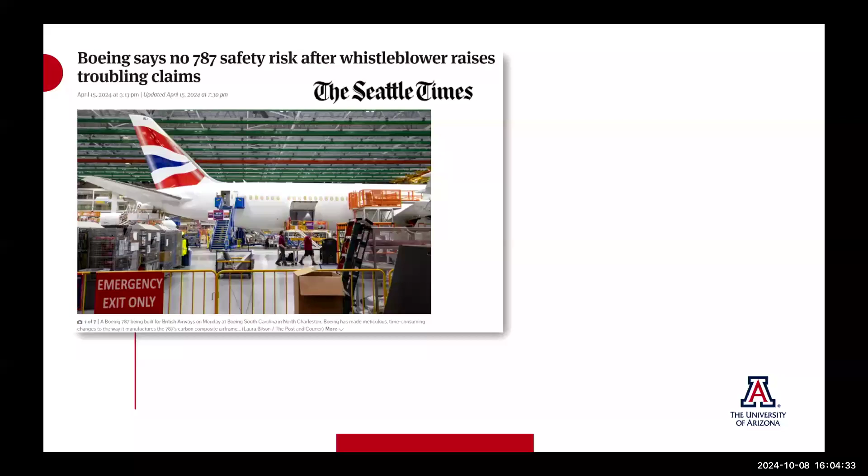So when we think manufacturing, it's actually a little bit top of mind. We've seen a number of headlines that have talked about manufacturing. Of course, not all of the reasons that Boeing is in the news have to do with manufacturing, but some of them do. There's been various quality issues, whistleblowers coming out and saying that some of their processes for dealing with deformed parts because of various manufacturing processes are inadequate and could lead to increased load beyond what they say in some of their documentation. Tesla has been plagued with some manufacturing issues of various kinds.

I think that this isn't a surprise to many of us with mechanical engineering backgrounds. Doing manufacturing is not easy, and incorporating an understanding of the manufacturing process into our design decisions is perhaps not intuitive and can often be challenging because we don't have adequate tools or methods to do it well. So that's kind of what I'm going to be talking about today.

I'll start with a little bit of specific background that's been motivating for me, which is some work that I did in grad school and shortly after, specifically interviewing startup employees, startup founders, and startup employees about their design for manufacturing practices. This is not exactly the same as industry practices, but I think that there's some natural synergies across the two.

Dr. Kramer and myself did an interview study where we recruited 12 employees, 12 engineers at various startups. It's a little bit of an eye test for those of you in the back of the room, but you can see that their titles varied: CEO, CTO, design engineer, senior mechanical engineer. Job experience, the lowest was 2, the highest was 12, so moderately experienced, not extremely, but still many years of experience. The sectors were pretty widely varying with size of employees going up from 1 all the way up to a pretty successful startup with over 1,000 employees.

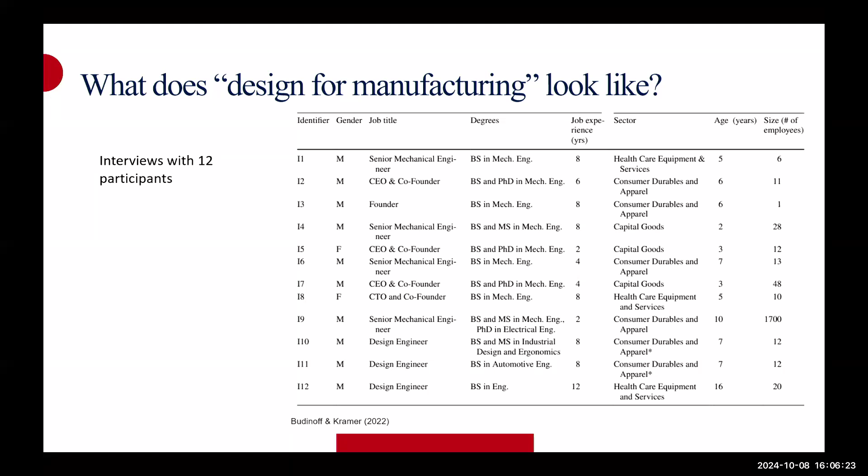We found a variety of design for manufacturing practices. These might not be things that came out of a textbook, but they were ways that the engineers told us they considered design, they considered manufacturing during the design process. We categorized these into 4 basic processes: considering different manufacturing processes before they had decided on a particular manufacturing process to use, understanding manufacturing constraints, identifying manufacturability constraints, more geometry specific, and then troubleshooting manufacturability problems.

You can see that in increasing lightness of the blue color, that's increasing specificity to their particular product. Across the top axis, we have a general design progression. Of course, it's iterative, but from initiation, we found a big difference between when they had CAD and when they didn't have CAD in their processes, and then after the first large production run.

So we identified common practices and mapped this onto these 2 axes. I'll read some of these: consult external resources, that might be a website, it might be a textbook; identify flexible manufacturing processes that would allow them more room to maneuver in the design space; use cost modeling; use personal knowledge of manufacturing processes; incorporate existing designs and use them as a baseline; consult manufacturing experts for feedback; conduct design reviews with manufacturing experts; utilize CAD manufacturing simulation tools; and actually try and get experts to help with production problems and testing the product to verify performance with as-manufactured properties. This encompasses from all 12 engineers, pretty much everything that they said could be mapped onto one of these specific practices.

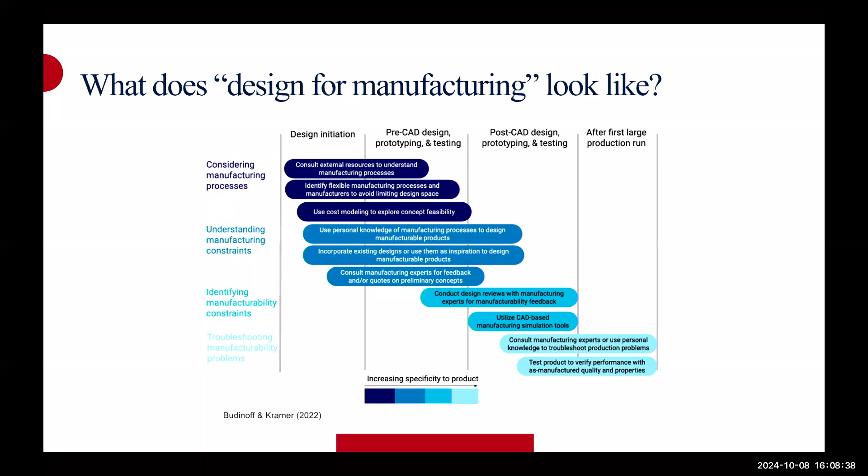So across the top axis now, we have all 12 of our designers. The color indicates the number of instances where they described using this DFM method.

I'll highlight three. The first one is consult external resources, something like I looked at a textbook, I looked at a blog. That was by and far the most consistently and most used process, but it's fairly basic and also not very specific to a particular part or geometry.

Another one is use personal knowledge of manufacturing processes to design manufacturable products. People spoke about taking a machine shop class and understanding what could and couldn't be manufactured based on their hands-on experience with a particular process.

Then finally we have two related ones that were pretty widely used: consult manufacturing experts for feedback and/or quotes on preliminary concepts, and do design reviews with manufacturing experts. These were pretty consistent, where people did this a lot.

Obviously there's some pros and cons for each of these. At startups, they're fairly resource constrained, so they didn't have tons of money to go out and do lots of different reviews or pay for a lot of different simulation and analyses.

So they used their potential vendors to give them feedback. It's a nice, efficient process, but they were pretty dependent on the quality and the time these vendors were willing to give them. They trusted them to have expert guidance, and they were really reliant on the success of their products being tied to the quality of the feedback they got.

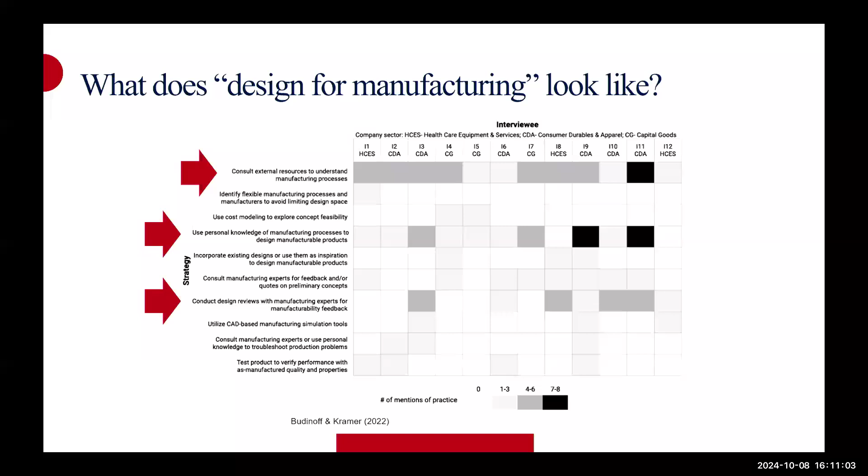One quote we had from a participant was, 'You just need to have scars, you have to have the scars of messing up.' And her mentors were like, you will get those, but right now, in order to save your startup company, you don't have the time or the money to afford those scars. You need to look at a guy who has seen that problem for 20 years.

From this, we understood there was a lot of respect for the expert feedback that external vendors could provide. One reason is because they looked to them for product-specific feedback, based on their CAD models and CAD drawings. They had essentially no other way to get feedback specific to their designs beyond relying on these external vendors. It was their only option to get part-specific feedback, and they really valued that.

It needed to be specific. So looking across all of our interviews, we can extract some of the designers' needs. One is giving feature-level, geometric feature-level feedback that's very specific to their design—this section is too thin, this section is too thick, this will be difficult to access, et cetera.

They really wanted iterative rounds of feedback. They valued working with vendors who would not only respond to a single emailed drawing, but multiple rounds and would work with them iteratively. They really wanted the feedback to be based on deep process expertise.

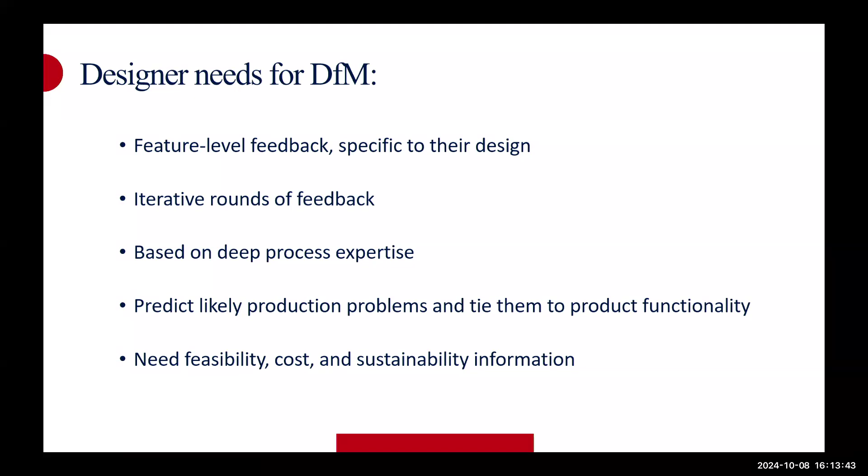Let's talk about what exists for them. We have all these methods that designers felt were organic, emergent practices that they developed through their own practice, their own experiences. If we look in the literature, there's a fairly narrow range of what's considered DFM tools.

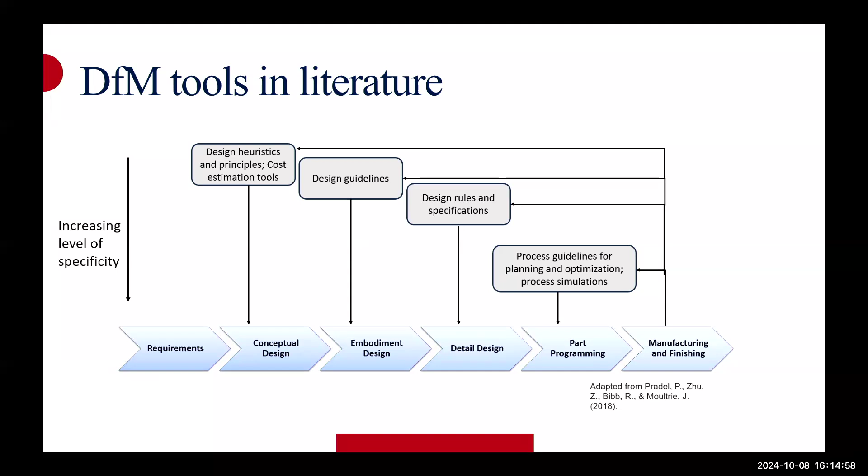But something we see is there's a really big jump here. If you look at the design rules and specifications, the design guidelines, these tend to be just simple heuristics. They tend to be very hand-wavy—keep your pockets to approximately this depth, without a lot of specific guidance. It's also generally just a rule, something you can manually check, but it's not easy in many cases to actually evaluate for a CAD model. Whereas for process planning and process simulations, that typically needs some sort of CAD model as input.

So we see this big disconnect in the middle to early stage design, where you might have a sense of what your geometry looks like and should look like, but you don't have existing DFM tools that can take that as input. So in general, we see this mismatch between designer needs and current capabilities.

If we look—quick question, yeah, just on the last slide. Where would you normally find that the process gets, maybe not the parameters, but the process itself gets defined?

The process gets selected—like, I'm going to do machining versus something else—probably around here, in embodiment design. So in detail design, this is like, I'm going to have part A and part B in embodiment design, and then in detail design, this is the geometry of part A. It will be this big, have this kind of feature, and it will be sheet metal formed.

Yes, through the... yeah, but embodiment design, I think, is when you start to at least have a sense of the process, but not the exact size of each of the features. This is where you could do a back-of-the-envelope sketch, give the overall feature size, do a rough CAD model, but not finalize it. Thank you.

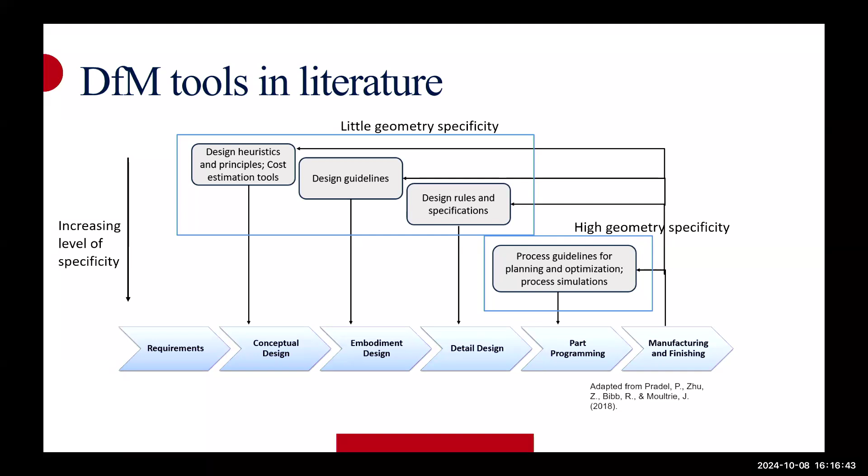Okay, so there's a mismatch between designer needs and current capabilities. If we look at the various solutions in that bin—DFM heuristics, process design rules—there's also a couple of software that exist. aPriori is a startup I think was founded in 2018 or thereabouts. DFMPro is another software.

Let's look at how they map onto designer needs for part-specific results, cost, manufacturing, being able to predict a deformed or as-processed geometry, being compatible with early design, and considering many different manufacturing outcomes. So yes, academic heuristics and guidelines are low cost and easy to use in early design. Existing software can give part-specific results, but it is not low cost—the subscriptions can actually be pretty substantial. It's their entire business model; they're not going to give it away for free.

They typically don't predict manufacturing geometry, but they do basically predict compliance with the design rules, and they can give estimates of cost. So that's what they can provide. They take as input a fully defined, finalized CAD model, and in many cases, they don't consider that many manufacturing outcomes.

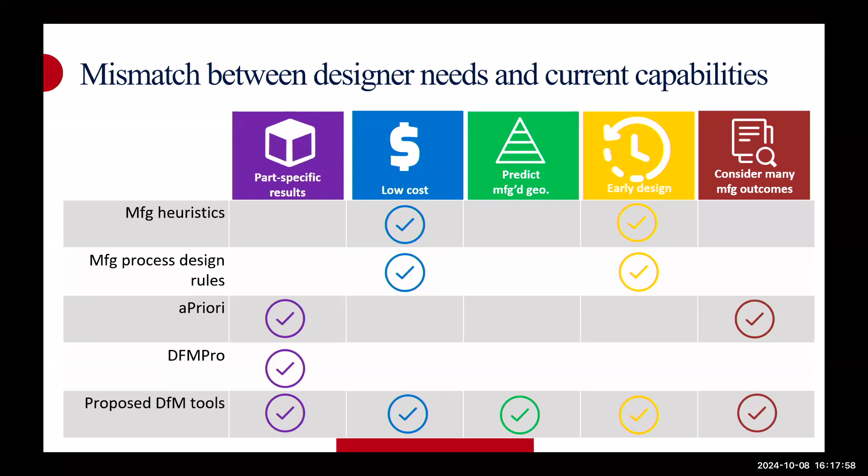So what I want to do is fill this space. I want to develop DFM tools that can check all of these boxes and meet designer needs. Ultimately, my research goal is to develop computational tools that can fill this gap, that can connect designers easily to manufacturing knowledge, so they can get better manufacturing outcomes and design better quality parts. And the software side of it is interesting to me too.

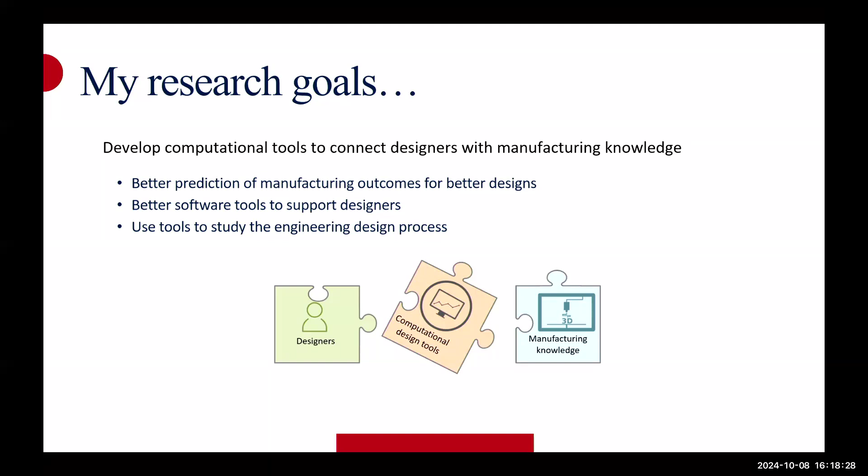I want to develop software tools that can support designers, and then assess how these tools can actually be used in the engineering design process. Today I'm going to talk about 3 studies in that broader category: the effects of DFM tool modality, comparing computational tools to heuristics; surrogate process models to see if they can provide high fidelity feedback faster; and sustainability metrics and how they can be incorporated into decision-making processes.

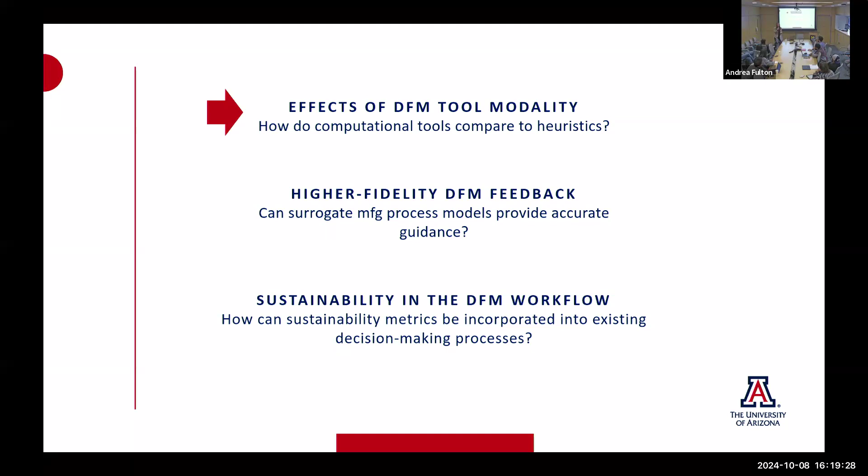So let's first talk about the effect of DFM tool modality. This work came out of my dissertation. I was a TA, and I saw a bunch of poorly designed and poorly manufactured parts for the class I was TAing. We asked students to just 3D print a part, and I would see the same failure modes again and again.

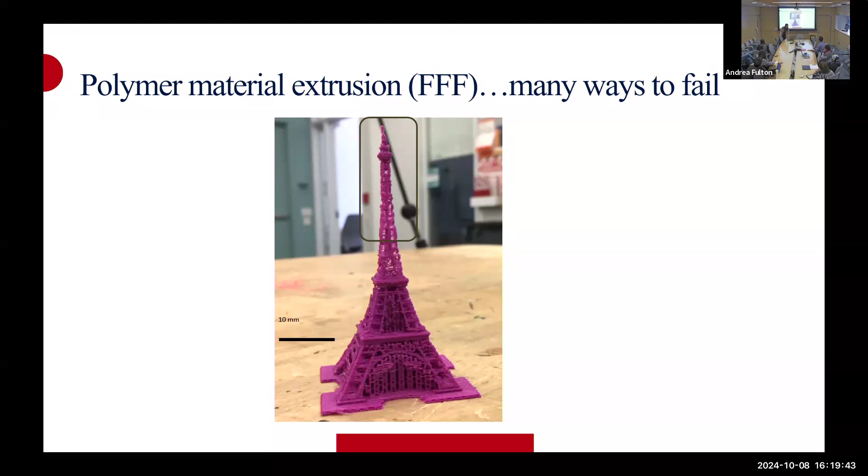So I decided to try and categorize these. I looked at the parts that students submitted. They tried to print a model that really should have been printed with SLA, where the minimum feature resolution was too high. They printed parts with ABS that would warp pretty substantially - you can see that much curl in a corner. They printed parts at ridiculous orientations that actually toppled over with no support material, mid-print.

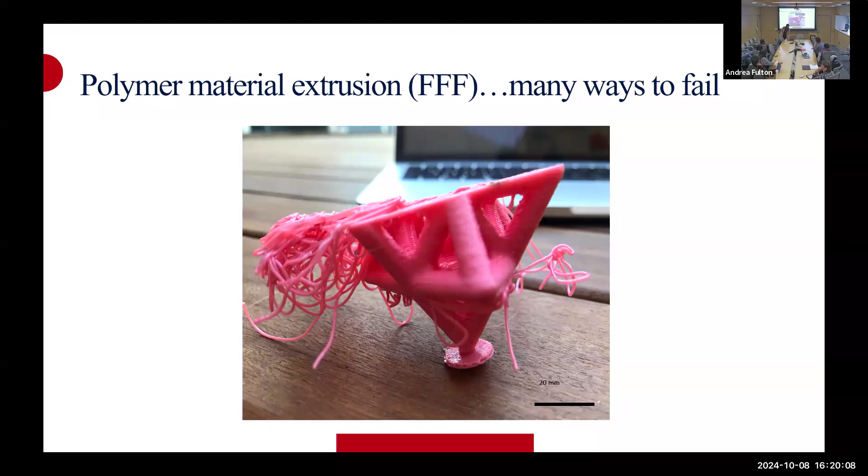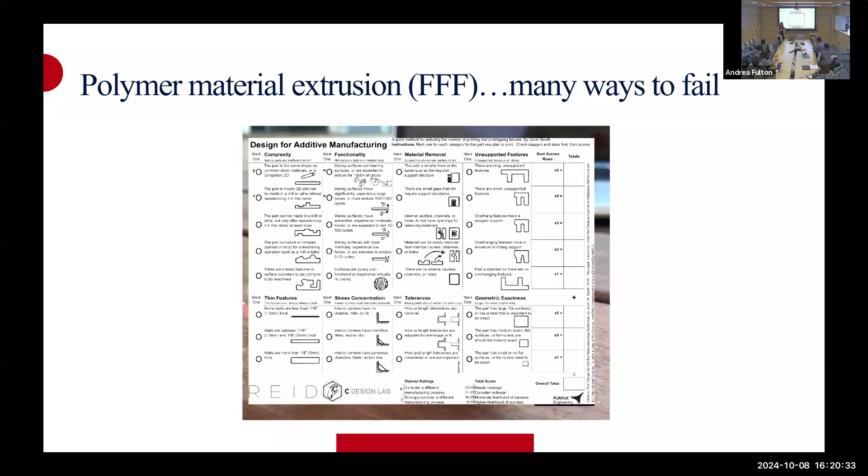So I categorized these and tried to develop a DFM tool to evaluate them. There's already some existing DFM tools that fit into that guideline or heuristic type realm, where they give you guidelines - this is called the DFAM worksheet. It gives you guidance about the thickness of different features, different types of forms, unsupported features, and so on. So I adapted this and made a version better aligned with the failure modes I saw in our students' prints, then made a computational tool that evaluated compliance with those rules.

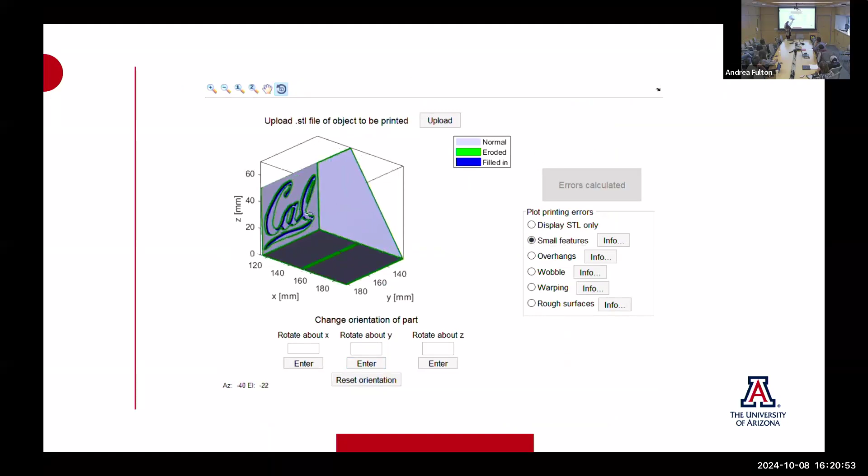So this is a part that's been uploaded, and these are the errors that I categorized - whether there were small features too small to be printed viably with 3D printing FFF. The computations you see are in real time: whether or not there's overhanging features based on the STL normal vectors, whether the part was likely to wobble and tip over, and then warping and rough surfaces as well.

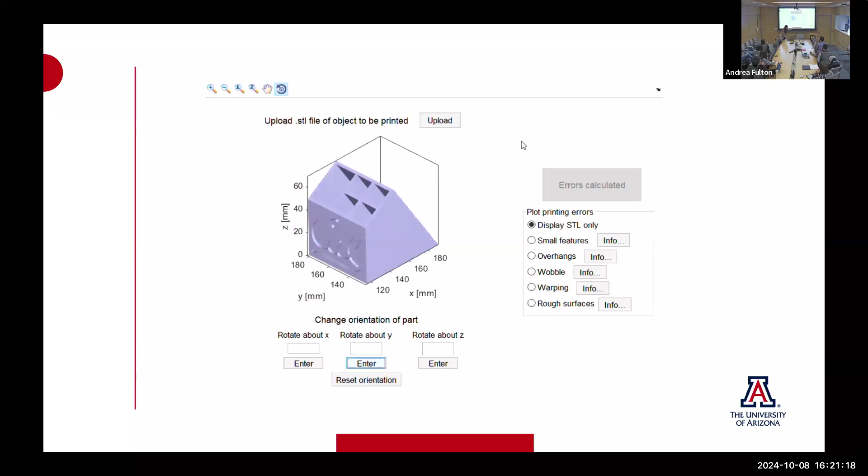As I said, the computations are pretty much near real time, and students could evaluate compliance with those rules. So my goal is to look at the effect of modality here. We gave participants a DfAM challenge where we asked them to redesign this basic pencil holder geometry that I designed specifically to be slightly difficult to print. I had features with very thin walls, like 0.1 millimeter thick on the base plate, and designed it so the orientation was somewhat difficult to select if you were worried about warping, since we printed purely in ABS on unenclosed printers back then.

I assigned people to 2 groups: one assigned to use the worksheet, the other assigned to use the tool. Then I looked at various metrics of their outputs: creativity, measured using subscales of usefulness, uniqueness, and elegance; the number of manufacturability violations, features that contrasted with what the tools told them to do; their total design time; and a survey measuring task load - how hard the task was for them.

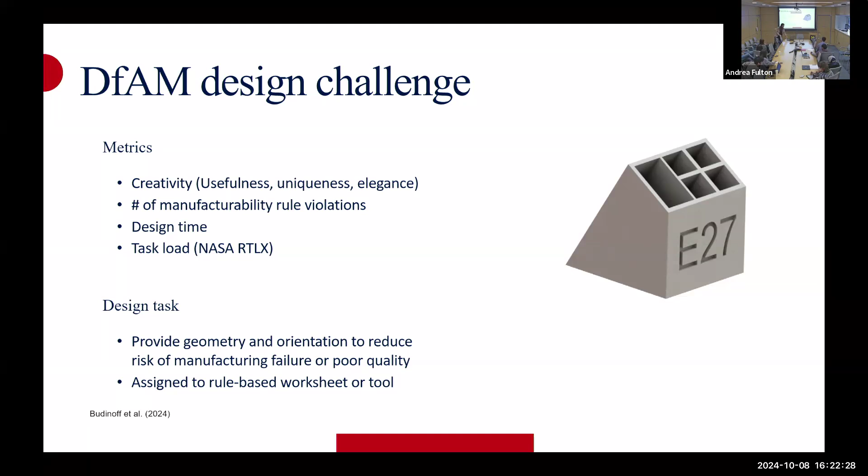The designs we asked them to submit included the build orientation and the redesigned part - we asked them to consider both the geometry and the orientation, the process plan, at one time. You can see a pretty wide variety of responses, fitting into a couple of different categories. A really common solution was: let me make a box instead, chop off the interesting features, and print a box straight up and down.

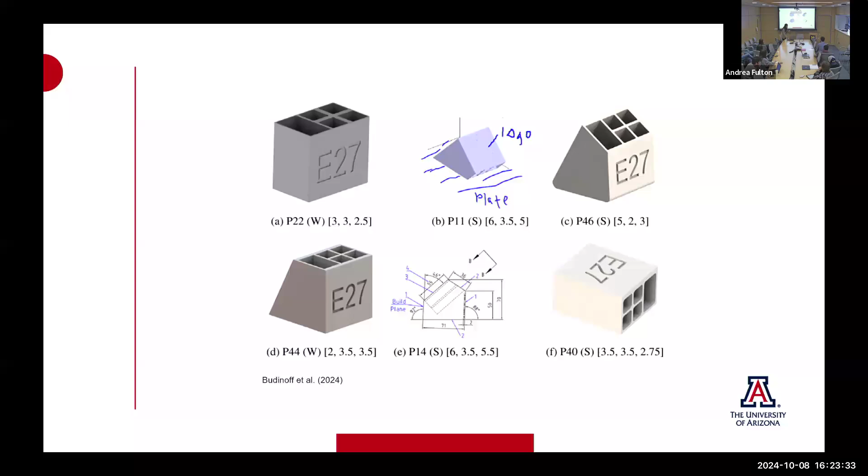Interestingly, a number of these designs actually introduced new design problems by having too-thin walls. Sometimes they would orient them in ways requiring a vast amount of support material. But we also saw slightly more creative solutions where they chopped off part of the back end or chose an interesting way to orient the part, preserving more of the initial geometry while still aligning with the design guidelines. So here are the 4 outcomes we looked at.

In blue, we have creativity. Green, we have number of manufacturability guideline violations. And here we have the time to complete the task. And this is the task load, essentially how difficult the task was for students to complete.

A couple of things I want to mention: time to complete was actually pretty similar, there weren't really big differences. Number of guideline violations is where we saw a large statistically significant difference, where students who used the software were better able to identify some of the violations that occurred.

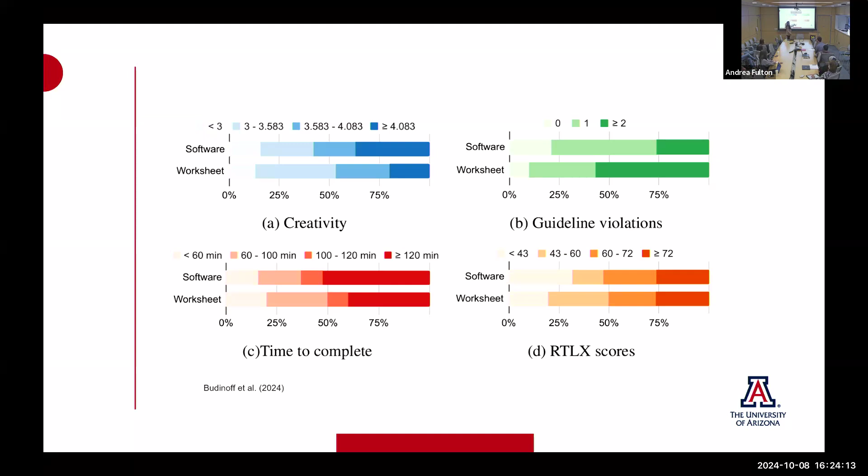Task load was pretty similar, and something we saw with creativity was that there were more highly creative designs from students who chose different orientations. The tool wasn't actually as important for creativity. What was important was students exploring and recommending different orientations—if they considered that as part of their design space and integrated the manufacturing process into their design decision-making, they were able to create more elegant solutions to the design problem, rather than just basically a shoebox with 4 holes in it.

In this upper corner here, we have a number of solutions that were coded as highly elegant and had high usefulness. All 10 of the solutions in the upper corner with the highest scores had alternate orientations—they weren't just a box standing on the build plate, they were actually oriented at a slightly different angle.

So in AM, we can consider this aspect as a way of expanding the design space. If we allow designers to consider their geometry and the way to orient the part at once, they can come up with more creative solutions overall.

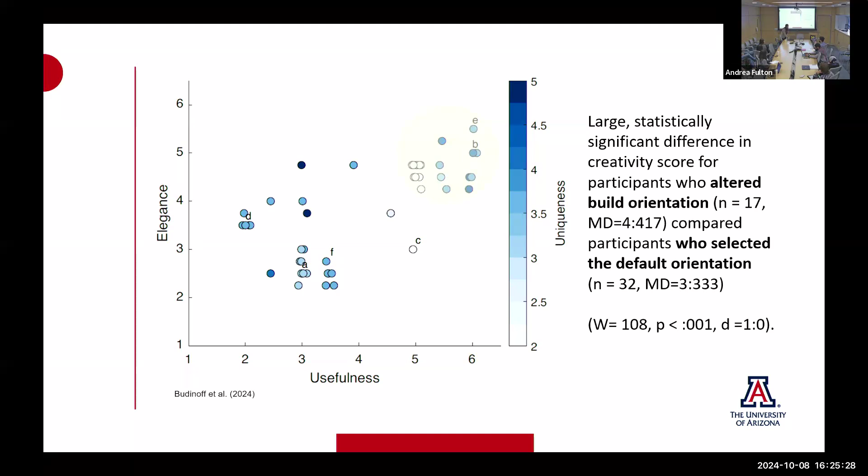This actually echoes back to the interviews we did with startup founders. One quote from one of our most experienced engineers, who was working in the healthcare equipment and services industry, said: in some ways, considering manufacturability limits your thinking because you know what is actually possible. But in some ways it actually expands your thinking, because it's like, okay, they can do this, and that'll spark other ideas, and you can potentially do stuff with this.

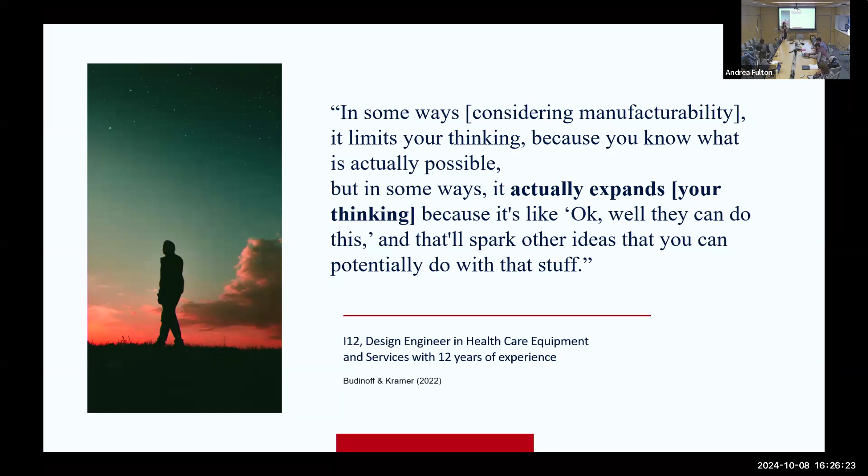So I think manufacturing is generally considered a constraint—it constrains designs, but in some interesting ways it can actually expand the design space and provide inspiration and different ways of making one geometry. The overall geometry might look slightly different, but there are various ways you can actually create it. I think there's a really interesting association between manufacturing constraints and creativity that I'm looking forward to exploring more in future work.

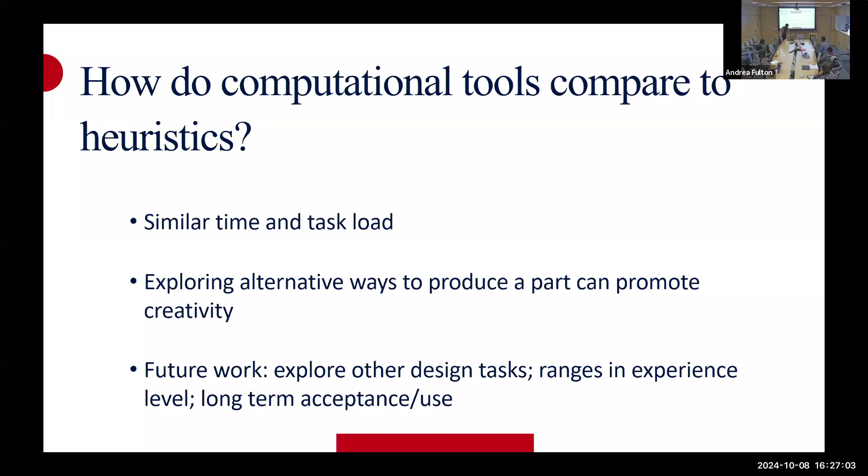Going back to the high level topic, my question was: how do computational tools actually compare to simple heuristics like we saw with DFM? In general, we saw that time and task load were similar, but there's this interesting connection between creativity, alternate orientations, and alternate process plans. In future work, we're looking to explore this for other design tasks and for a broader range of experience levels—this was students, so it would be interesting to compare with more industry practitioners and look at long-term acceptance and use.

All right, I'm going to move on now to the next topic, which is higher fidelity DFM feedback. For this, we're going to transition to a different process.

How familiar are people with laser powder bed fusion? Not so familiar. So laser powder bed fusion is similar to polymer 3D printing like you saw, but instead of taking a filament of plastic material, it has a powder bed, and then there's an energy source that essentially melts the powder together. It still works in a layer by layer process and can form fully dense, or pretty much fully dense, parts additively.

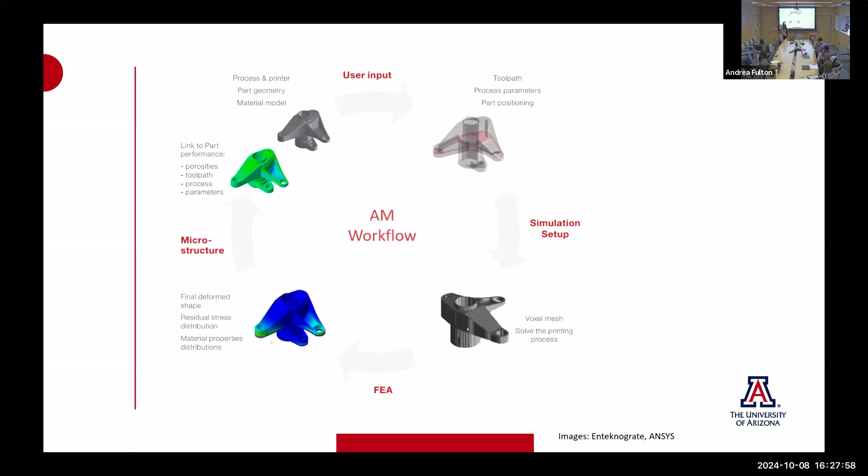So in the AM typical workflow, there's actually important use of process simulations to compensate design. You take a CAD model and use FEA type tools to predict how the part is going to distort. You have relatively cool powder that's pretty insulating for the part, and then you introduce your hot energy source—melting powder is a really thermal process, with high thermal gradients, really hot parts and really cold parts of your build. This can create issues with distortions, issues with cracking, and your part can actually fail to build—you'll have a big crash in the middle of a build, for example.

So simulations can help guide designers to compensate their designs, to selectively shrink or expand portions of their design so they print with better quality. It can also help them select a build orientation. So these are kind of design tools, but if you notice, the geometry is essentially fixed—they're not considering any geometry changes.

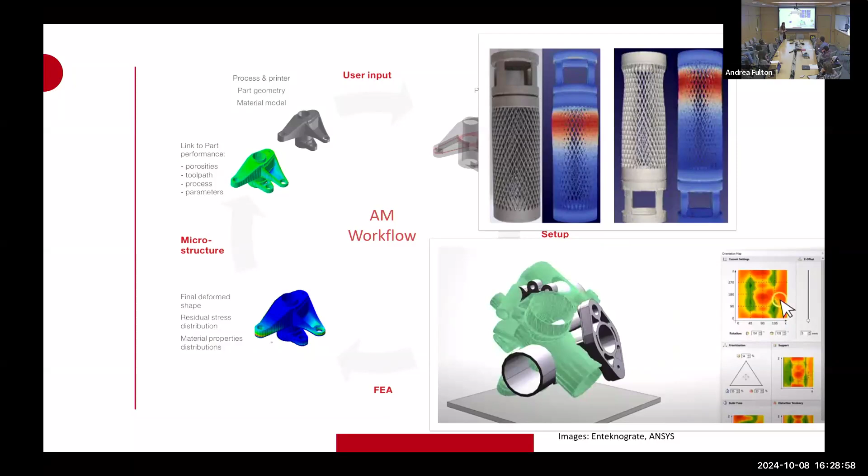They're not optimizing the design in any kind of iterative way. So my goal was to do this earlier in the design process, when the geometry can still be changed. How can we help designers actually make better decisions?

Similar to the DFAM worksheet you saw before, there's a version that's been proposed for powder bed fusion that gives guidelines for overhangs, types of cross section, surface finish, etc. You self-score this: you have a geometry, you go through the worksheet, and you give yourself a score.

If we look at a variety of different sources, we're trying to minimize part distortion and build failure, just have better quality parts that aren't going to fail to print.

Some guidance is to avoid large solid volumes—it's harder to print big chunks of metal than smaller chunks. Use fillets, minimize the size of unsupported downward facing surfaces, and avoid abrupt changes in the thickness of your parts.

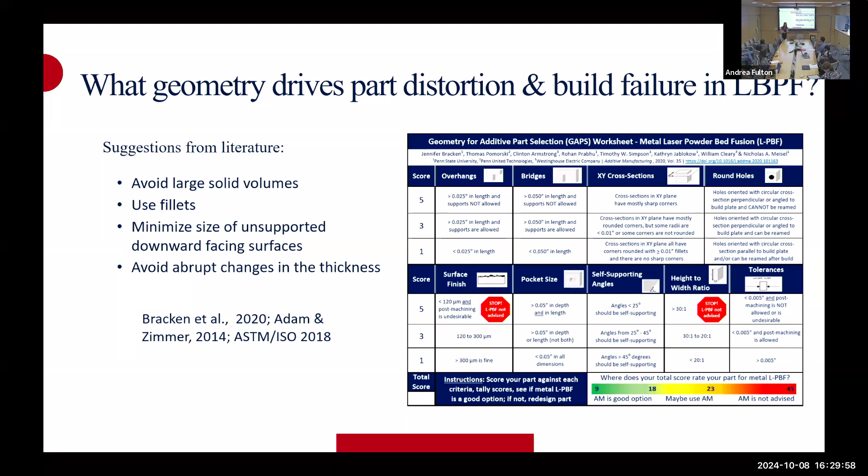So those are some general guidelines, but again, all this guidance is fairly ad hoc. It's based on anecdotal evidence, and designers have to apply these types of rules themselves.

My background in my dissertation looked at computational geometry approaches. There are a ton of different ways we can analyze part geometry and quantify differences in part geometry from the computer science and computer graphics field. Broadly speaking, I'll refer to these as shape descriptors—ways of describing and quantifying a part's shape.

At the most basic level, this is something like area, right? That's an easy shape descriptor for us to get our heads around. But then there's weirder things like surprisal, which has information about how fast a contour changes. There's various metrics you can quantify for the horizontal distribution of material.

So I found a bunch of different shape descriptors and generated some new ones based on the guidance you saw on that last page. How can we predict, how can we quantify changes in shape that might be correlated with bad manufacturing outcomes?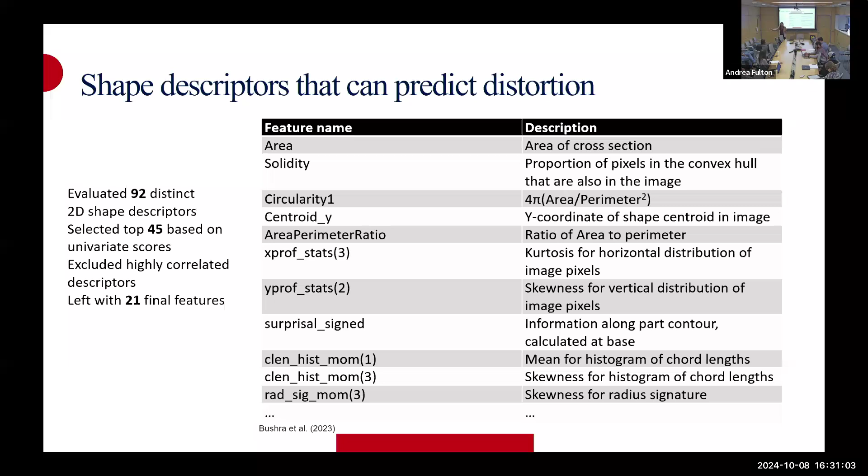To do this, we restricted ourselves first to 2D cross sections, so axisymmetric parts, because I wanted to analyze one cross section, calculate the shape descriptors to describe the volume with only a single image input. We're expanding this to extruded parts, more complex parts, but this is just our first data set. So these are the 2D cross sections.

We can calculate area easily, but the other things take a little more work to calculate. We calculated a set of 92 shape descriptors for each of these, and we have 324 variations—we varied the part size and then the geometry itself.

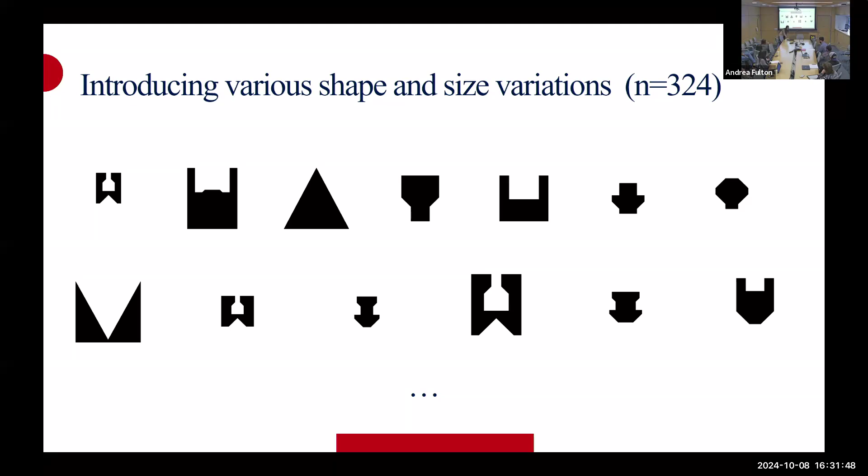Then in order to predict the manufacturing outcomes, we did FEA simulations of the laser powder bed fusion process. We simulated with an EOS machine on titanium using a commercial package that employs a lumped layer model. We considered plasticity and had calibration factors experimentally derived and validated to give us good agreement between the simulation and the prediction.

From these complex fields of distortion, we selected a single value for each part: max distortion. This was just our first way of estimating the manufacturability of the part, considering that high max distortion values would likely be associated with parts having high thermal gradients that may fail during the build process itself.

There are other metrics you can choose—this is just the first one that we did. Something I'll note here: these are relatively small parts, about handheld size. It's 1 to 90 hours of computation per part based on the FEA model.

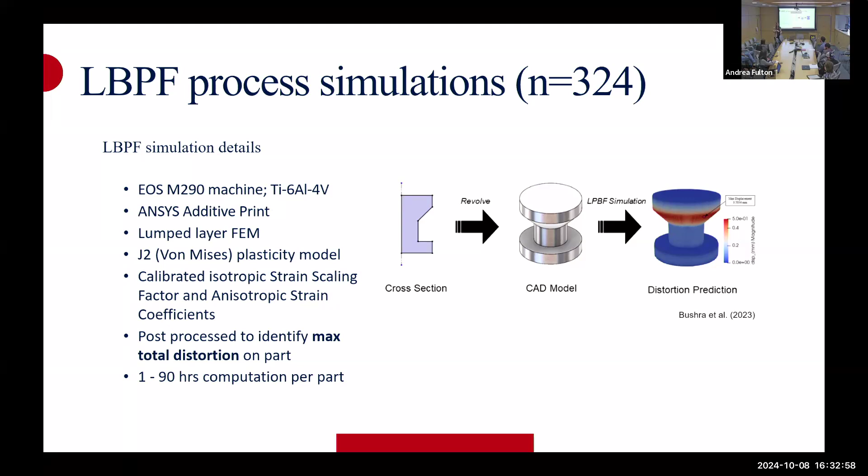So our goal is to develop a surrogate model that can do this faster. That's what we did: we analyzed each cross section, generated a list of shape descriptors, narrowed down the ones that provided us with the most information, made a CAD model, ran the simulations, extracted the max displacement, and then trained a machine learning model to do this faster.

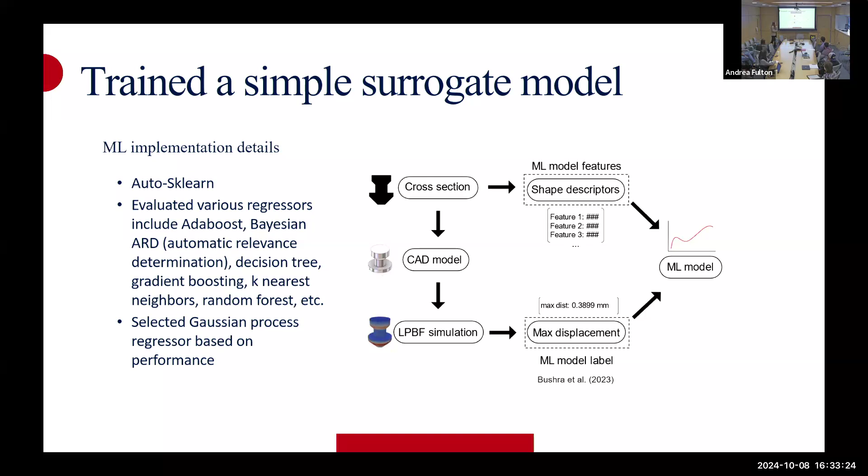We used Gaussian process regression, but we evaluated a bunch of other options using auto-sklearn, a nice Python implementation. In the end, we were able to develop a fairly accurate prediction model. I have test data—we used about a quarter of our data as test data and the rest for training. You can see pretty good agreement between the predicted values of distortion and the true values.

Again, this is taking a 2D cross-section of just the geometry, no other information. We're able to predict the max distortion of that part with about 0.068 millimeters accuracy—that's a couple thousandths of an inch.

So fairly good accuracy for a pretty good range of different geometries and parts.

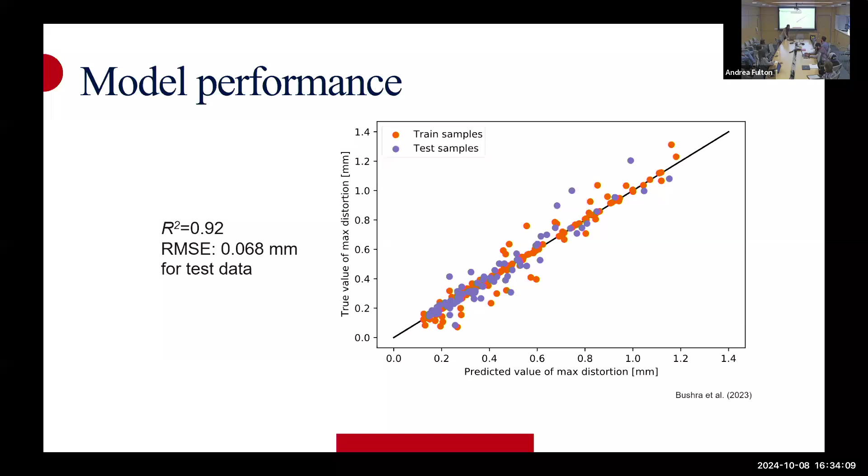We wanted to get closer to design guidance, so we looked at the types of shape descriptors and the permutation importance. Basically, if you allow a single descriptor to vary at a time, you can see how much it changes the output. We actually interestingly found that surprisal, which has to do with the contour shape on the build plate, was the most important. The connection to the build plate essentially was the most important part of the geometry, beyond area or some of the other things we thought would happen.

But in general, all of the highly important features were associated with the distribution of material along the XY axis, which makes sense with some of the guidance that was given, but now we're able to actually calculate its importance. And this can be translated back into guidance for CAD.

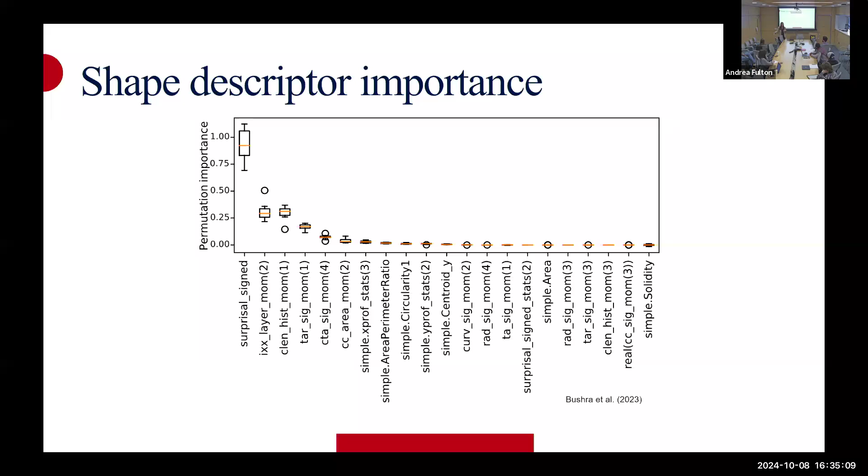Essentially, we can take this information and incorporate it into a plugin. So a designer would be prompted: you have a really high value of X shape descriptor, we suggest you change X feature, something like that.

So right now we're at the preliminary phase. This is based on a conference paper that my PhD student and I wrote, but we think there's really good promise here to use shape descriptors as the basis of more explainable ML methods.

You can do this with a deep neural network type ML model, but the problem is it's difficult to translate that backwards to design guidance. Essentially, you could have a really good prediction, but the designer wouldn't have an actionable idea of what to change. It would just be, oh, high distortion. Okay, what should I change? Should I scale it down? Should I adjust this part, this part, this part? It's difficult to do that with deeper ML methods.

So using our feature-based approach, it's more interpretable. But we had good accuracy.

We think that this also is interesting because image input, using a 2D input, can be helpful for earlier design feedback when a designer might have a sketch of something but not a fully fledged CAD model. So we can use that sketch type input directly and come up with some sort of prediction.

We also think there's a really good opportunity here for these shape descriptors, these ensembles of shape descriptors, to be used for different manufacturing prediction problems. We could use this to predict build time, we could use this to predict castability, we could use this for essentially anything, because you're just capturing a lot of the geometric information about a part in a very concise way that can then be used as input for really any ML type application.

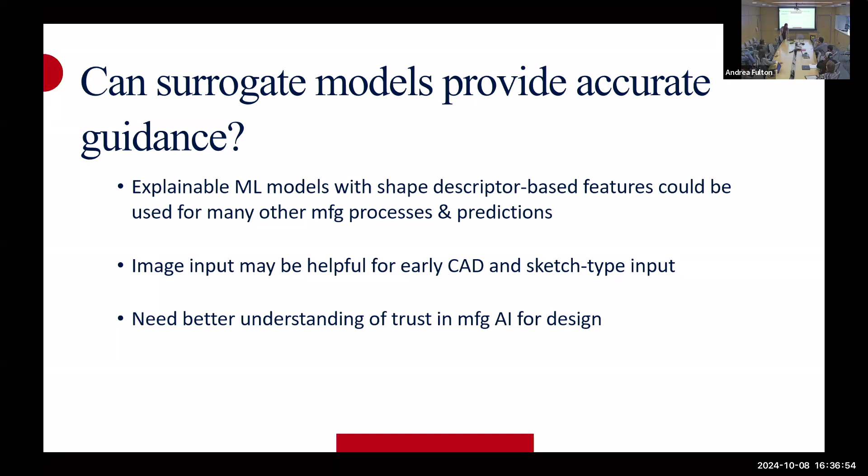Can you real quick talk about, sorry, rushing for time here, but the scan path generation of the lasers, because that will affect largely how the thing's going to print. What model or system did you use for scan path generation?

Yeah, so that's a good question. In ANSYS there are different levels of accuracy, and they come with a trade-off of speed, of prediction speed. So for this lumped layer model, I need to double check with my PhD student, but I'm pretty sure what we modeled was a single layer at a time. So it doesn't consider the effect of one particular scan path versus another. You're right that it does matter, but this can get us part of the way there with a simulation time that's tractable to make hundreds of simulations.

Absolutely, I was just thinking like for distortion mitigation, that's a common strategy, to spread out your scan path. Right, but yeah, I think it's also a question of where do you want to do a lot of your design work. Do you want to change the geometry, or do you want to change the parameters? Ideally maybe you change both at once, but this is just trying to get more at the, let's change the geometry. Yeah, great question.

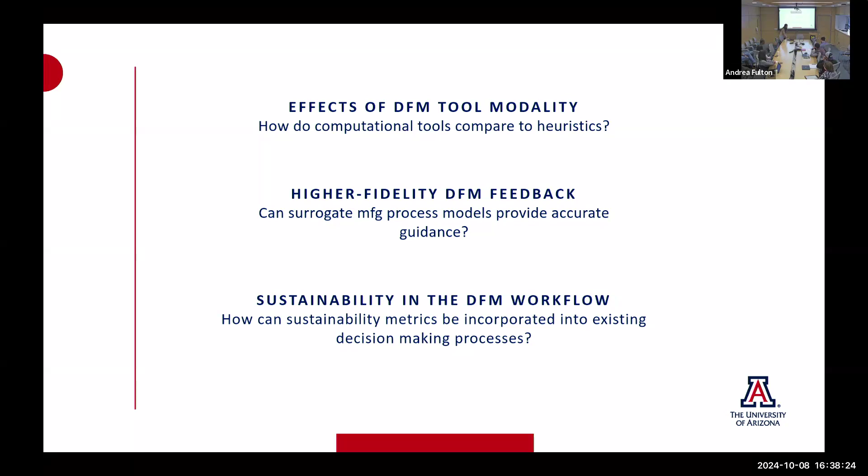Okay, so then I'll move on to this last piece. I've talked about manufacturability a lot. Let's talk about sustainability. How can we incorporate some sustainability metrics into the design for manufacturing process?

Moving back to material extrusion, FFF, there's been various life cycle assessments for FFF, but what we see is that the 3D printing process itself is fairly energy intensive and can actually drive a lot of the total impacts. These are various impact categories, global warming potential, etc. You can see that the 3D printing process is responsible for a majority of the impacts.

However, the energy consumption actually varies widely based on the part you're printing, the printer, and the specific use case. Reported values go from 0.36 all the way up to 612 megajoules per kilogram for specific energy. So a ton of slop in that estimate. If I ask you, can you try to reduce energy consumption by 10%, it's going to be difficult for you to know if you need to shave off 60 megajoules per kilogram or 0.3 - multiple orders of magnitude there, it's a lot to work with.

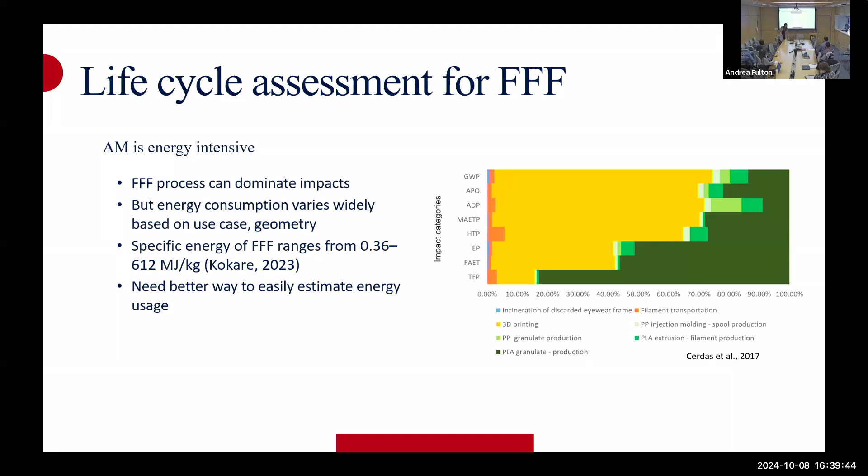So we need to be able to more easily estimate energy usage. That was the motivation for this project. My PhD student David and I went through the literature and found existing models - these are all empirical or semi-empirical models that estimate energy usage for FFF based on various factors, mostly empirical factors. Important terms you'll see are the temperature of the extruder, temperature of the build plate, and the production time, TP. There are also some models that incorporate the total amount of printed volume.

We gathered all of these models and wanted to see - they were all developed for a single printer and a small number of part geometries, so these are difficult to use for general design guidance. So what we did is compile a fairly large database of data from literature and from our own experiments - 374 different energy measurements of FFF printing for a pretty wide variety of different geometries, a fair number of small parts but also large ones, various materials, various different printers.

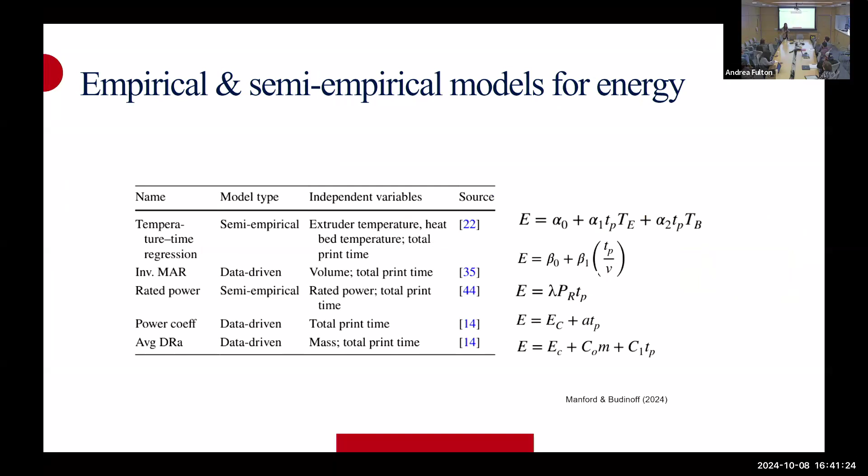So we split this into a training set and a test set, and then refit the empirical values associated with the various coefficients here, just to give each model an equal chance. Like I said, each of these models was developed for a single material in most cases, or a single printer, so we wanted a more general model.

We evaluated the performance - it's pretty good, and similar for the different models. This is a log scale, so it's a little difficult to see the difference in performance. If we look at the performance metrics - mean average error, mean absolute error, root mean squared error, R squared, etc. - we see that some of the models are actually garbage. Please don't use those. But the rest have R squared values around 0.94 and relatively small average errors.

If you know the build time, if you can plug that in, I can give you a pretty good estimate of the energy consumption. But that's difficult - if you're trying to get design guidance, how are you going to know the build time? So we used a general estimate of build time and plugged that in, and we got worse performance. Unsurprisingly, energy consumption depends heavily on build time, so the performance of the models went down, but we still decided to go with these estimates.

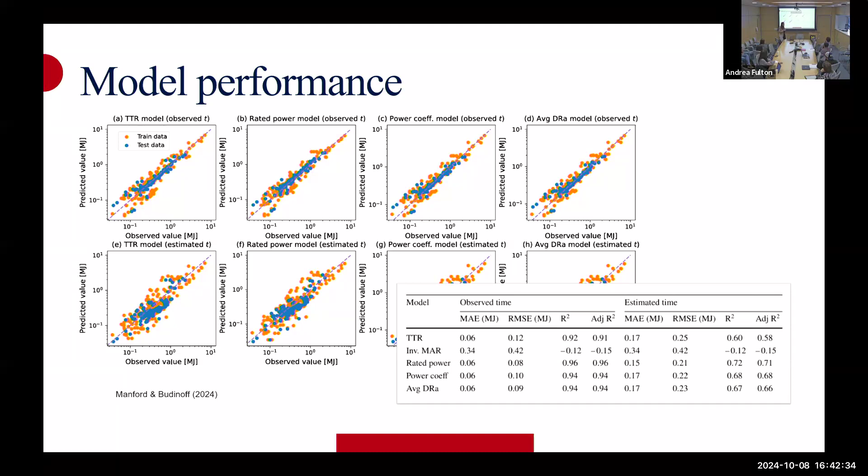We improved this slightly because we incorporated our energy estimates into Cura, a really commonly used slicer that prepares a 3D model to be printed. We plugged in these equations and used Cura's build time estimations, which actually go through the G-code and estimate accelerations and decelerations for the motors. We found that the estimates are pretty good in terms of build time. So let me show you that tool.

It's actually pretty fun to do. I've loaded one part - I have the Prusa, this is printing in PLA. I'm printing with 50% infill, a fairly normal layer thickness of 0.15 millimeters. The total amount of energy usage is about 4.5 megajoules of energy. But now that we have it, we can decide in real time what to change.

Okay, this is the interactive portion of the evening. What can we do to change the energy consumption? We want decent quality of this part - it's a bracket for a bookshelf. What do you want to change? Lower your infill density - lower the infill density, how much? 20%. 20%, okay.

The Cura slicer re-estimates the build time, and our model updates once it's sliced. That initial point isn't just the startup energy of the machine - it's more of an empirical model fudge factor. We're trying to move towards a better model that can do better estimates of predicting how much build time and warm-up energy will be consumed versus printing energy.

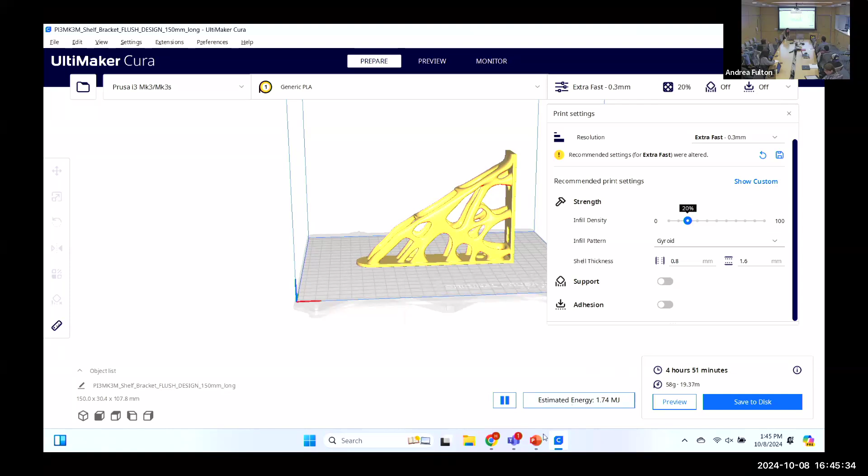Okay, and energy consumption - in terms of the variables it's sensitive to, that's what it's most sensitive to: layer thickness. But you can play this game and change various parameters and try to optimize for yourself as part of your workflow. And it's just something you can download if you want.

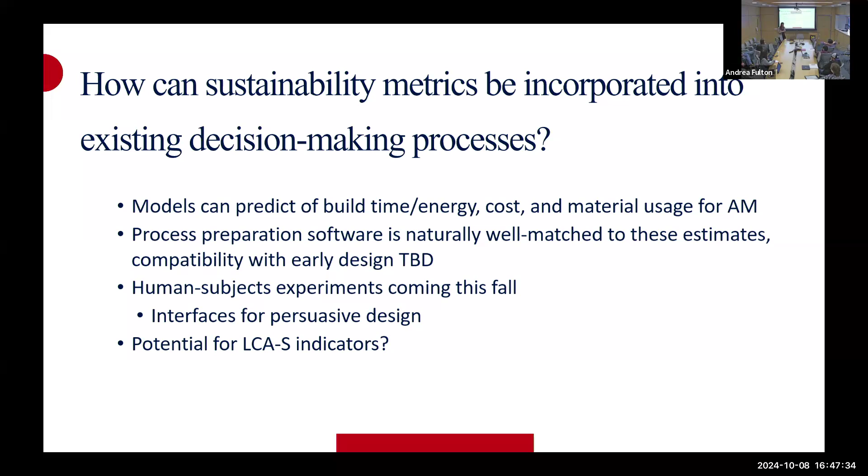All right, so I'm going to move on to future work. Something I'm really excited about is exploring how DFM tools can be used as persuasive technologies for design behavior change. So if our goal is to help designers be more efficient, and we've seen that technology can help them be more efficient, help them make more sustainable or better design choices, lead to improved manufacturability - how can we persuade them to make those choices?

In these fairly controlled experiments, we're kind of forcing people to use the tools. How can we actually design the tools so that in natural use, people are going to notice them, react positively to them, decide that the benefits outweigh the cost, and use the tools? So this is something where we're trying to draw guidance from psychology, behavioral decision-making, and also HCI to understand how to do better.

And then just work on incorporating these into different existing CAD workflows, where sustainability and manufacturability information is typically tucked away or not provided in a lot of detail.